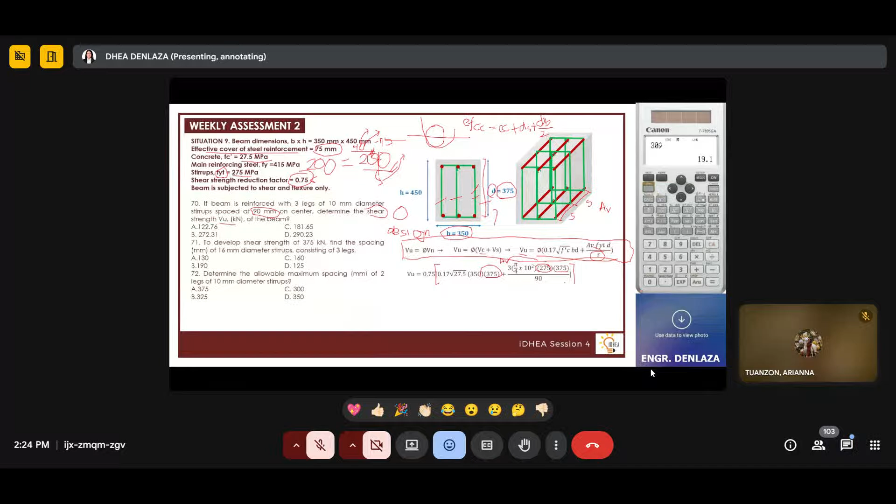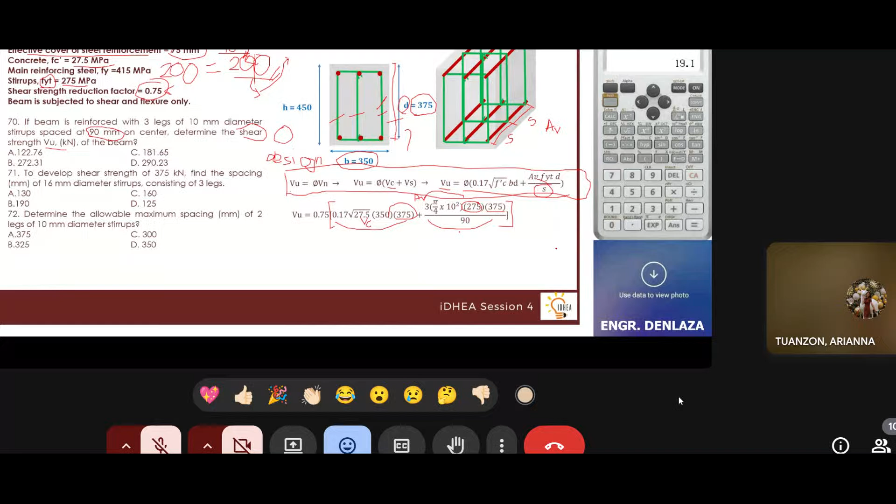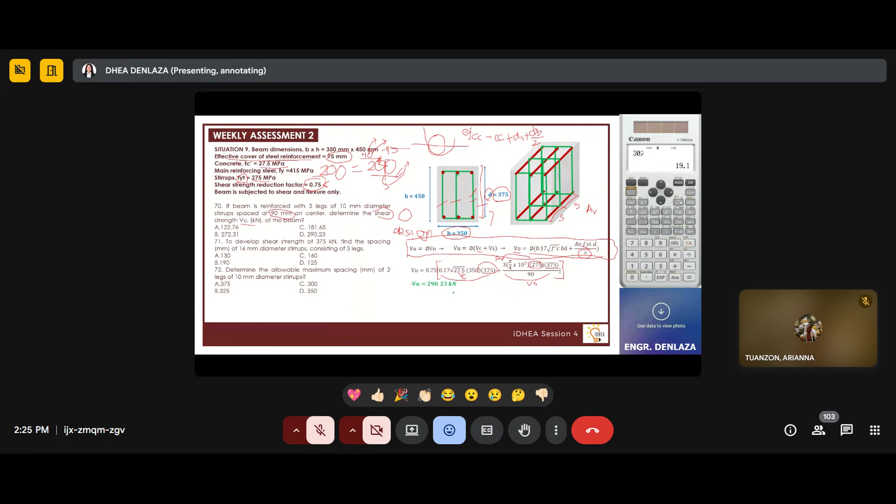So this is VC, the shear strength induced by your concrete, and then this one here is your VS. So you enclose 0.75 for VC and 0.75 for VS. When you type that in your calculator, you will obtain 290.23, and that is our final answer for this first question, which is 290.23.

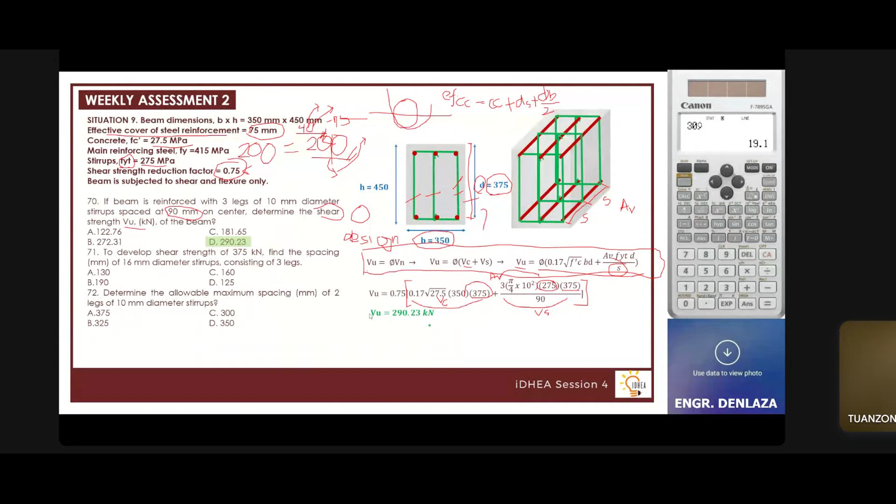Next question is to develop a shear strength. This time it's reversed, shear strength is now the given. We are to find the spacing of the 16 mm. This time the stirrups diameter is 16 mm, consisting of 3 legs, still 3 legs. So it's reversed from before, it's going from outside in instead of inside out.

When you expand, the equation still looks the same. That's VU. The reason it's e to the power, e times 3 here, denotes that it's times 10 times 1,000, rather times 1,000. 375, 375,000.

That is E3. And from 0.75, I just transposed the strength reduction factor under VU, guys. When you expand that, 0.17, 27.5, it's still similar. B 350 and 375 plus 3 legs, that is 3 legs multiplied by pi over 4 times. Now it's 16 here because the problem says 16 is to be used. And then 275 times 375, and the unknown here is the S, which I highlighted in green, and if you shift solve that, you will obtain an answer of 162.41 mm.

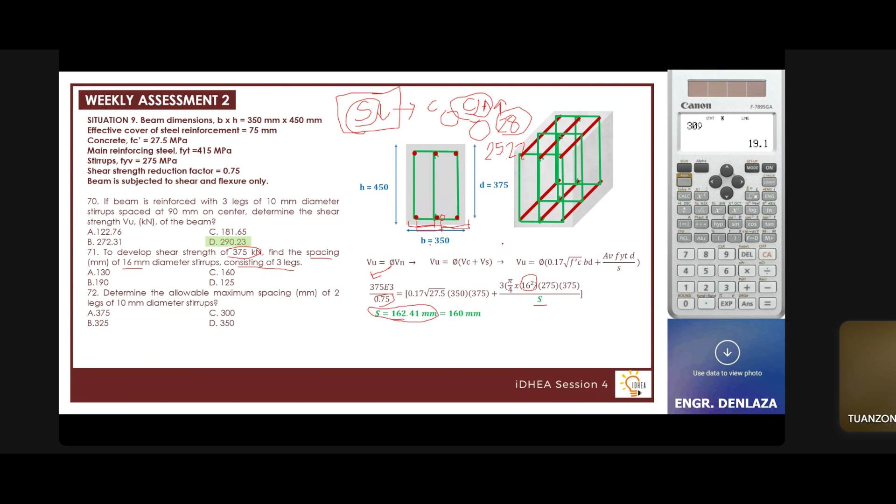Two legs - if you notice it's two legs because it was stated in the problem. Since it's two legs, it's in the manner of a U shape - it forms a U because it's two legs. The diameter of the stirrups to be used is 10 mm.

Based on NSCP, what is called the minimum area of your shear reinforcement has this formula: 0.35 multiplied by the base or width, multiplied by the spacing, over your FYT which is your yield strength of your stirrups. If you transpose this, isolating S to get the maximum spacing, S max, it will look like this - the AV is transferred up to the FYT, and 0.35 becomes the denominator along with your B. This is now your derived formula for getting S max, your maximum spacing.

But if it's too hefty for you and it's giving you difficulty, you can actually shift-solve automatically using this equation. This is just for visualization so you understand that this is the equation for your maximum spacing for stirrups. Now if you plug in the values from the problem...

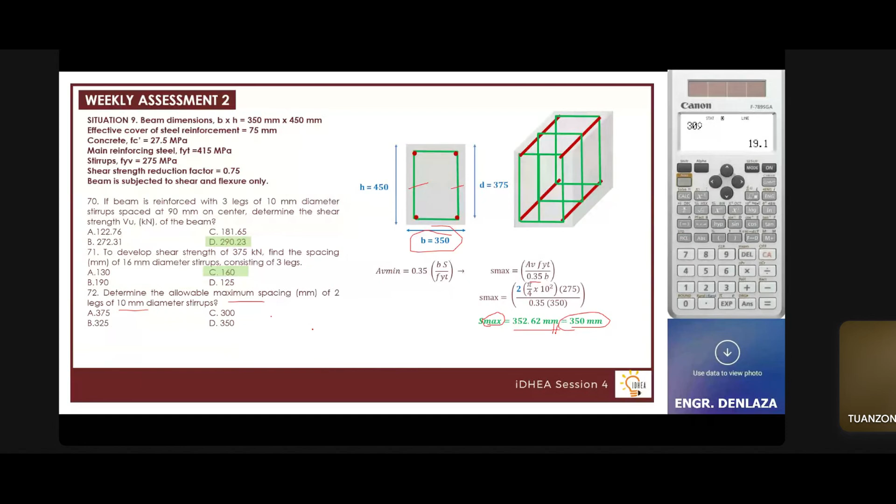And then B is your beam or base width, and you will obtain an answer of 352.62. If you notice, we round down because we cannot exceed that - maximum spacing means there's already a limit. So you round down, round down. That becomes 350, and that is letter D.

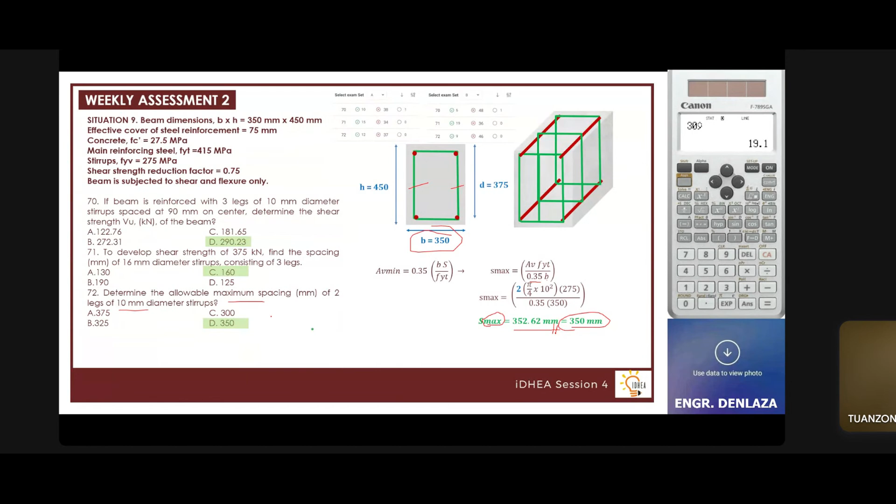Okay, did you really understand this? This discussion was quite long for this first problem - what is this called? Shear, since this is the first one about shear. In the latter part it becomes easier to understand since the concept has already been explained. Can you send me a reaction if you're still listening and if you understood that explanation? I know fast learners already understand, but I'm explaining from the point of view of others who still haven't understood the concept behind shear and how to approach it, so I hope you understand.

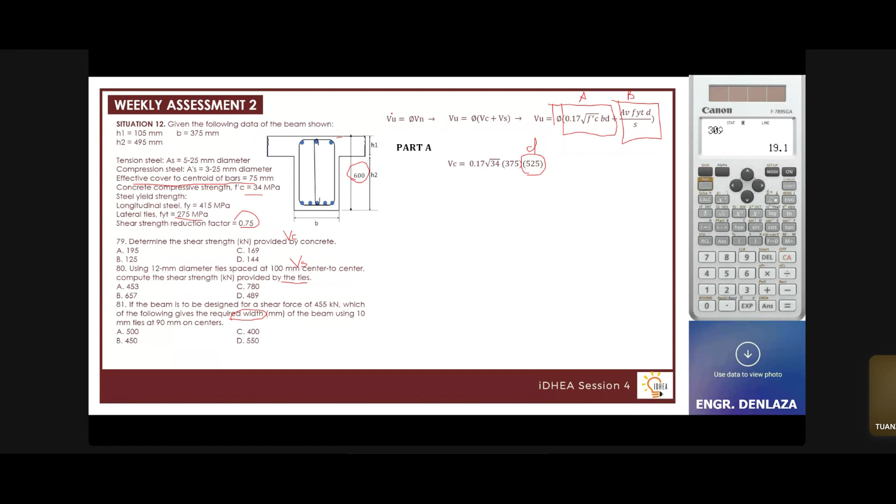And 600, since effective depth by design is defined as the distance from your extreme compression fiber going to the centroid of your tension steel reinforcement.

So in order for you to obtain the effective depth, guys, all you have to do is minus 600 with 75, which is the effective cover of the centroid of bars.

That 75 is also this height, guys. This is also 75. So if you check this illustration, 600 minus 75 gives the effective depth, which is 525. Okay?

All you have to do is calculate that. It's now 195.15. So it's not that hard a problem, ma'am. It's easy if we understand the concept, know the formula, and know how to approach it.

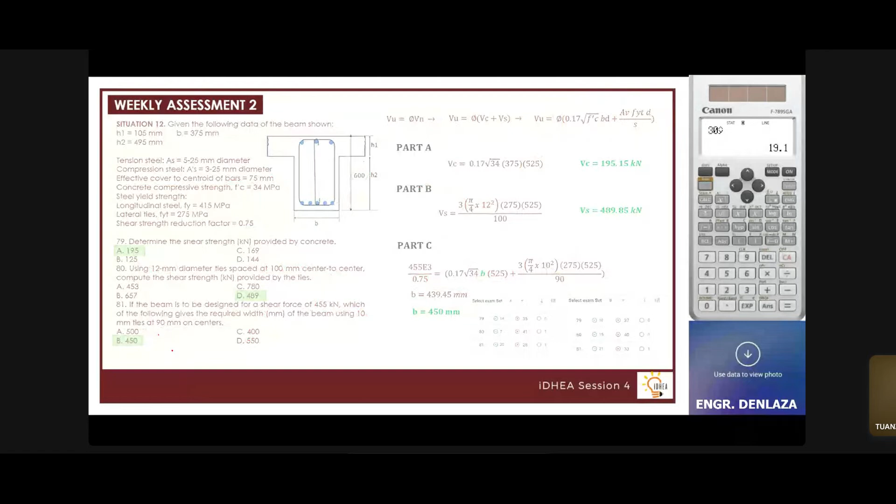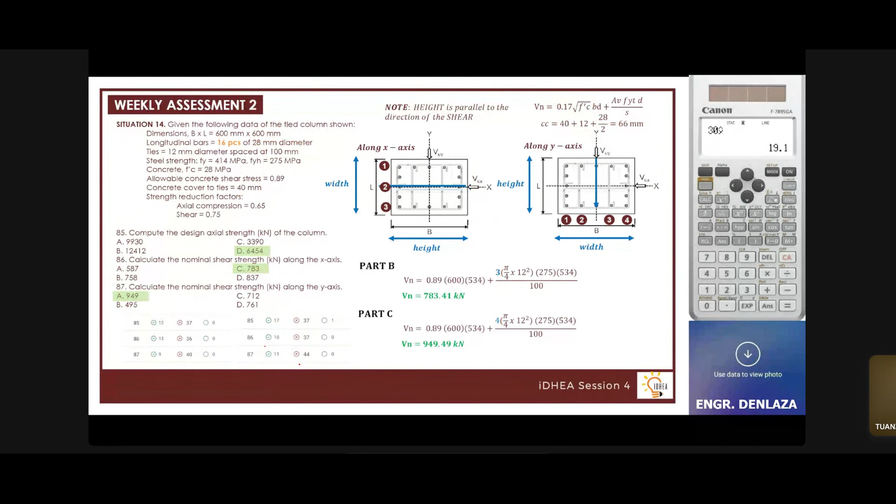Now let's try to solve this second to the last problem. Second to the last, this one too. Situation 15 for Set A is this one.

For those in Set B, please still listen, because what if you encounter this - the difference between both sets is just that Situation 15 for Set A is effective length chart, the alignment chart, and Situation 15 in Set B is the centroidal properties, the geometric and plastic centroid. I will discuss both so those in Set A and Set B can also listen to each other's questions.

Because this topic is still about columns. So it's given that there are columns and there are beams with their respective dimensions as well as their moment of inertias. Also reflected here are length 1 and 2, and height 1 and 2, and we have joint members A, B, C, D, and I.

We are to use the alignment charts in solving this problem. So the first question is: what is the effective length factor of DA? Given that it is inhibited against side sway, so basically it's non-sway, it doesn't sway.

Now, for the effective length factor of column DG - DA still applies here. That's what you analyze for number 88. And then for number 89, column DG is what you analyze.

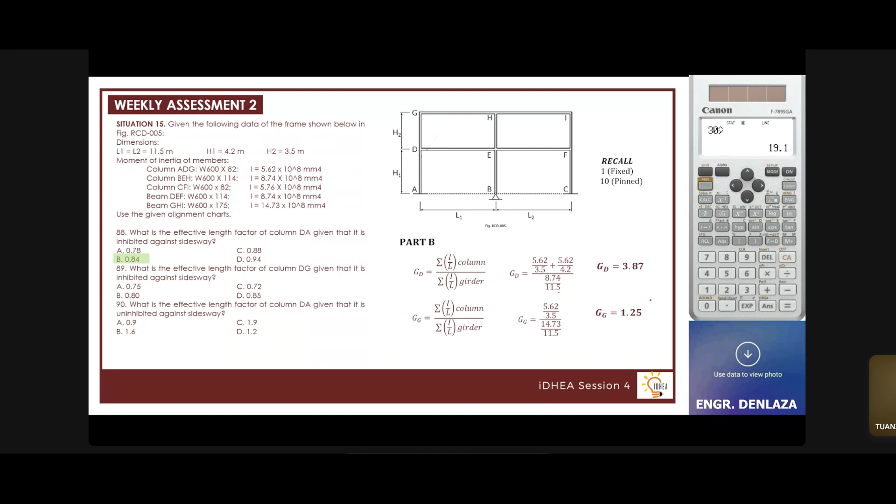Similarly, we'll do the same as the previous problem, guys. We'll plot these two values to form a line, and whatever approximate value that is, that becomes your final answer. So this is 1.25, probably around here.

And then how about 3.87? So it's somewhere around here, 3.85, 87, and then form a diagonal straight line. Whatever point here becomes your final answer. So the scaling tells us it is 0.85. Your final answer should be 0.85, and that is letter D in this problem.

And lastly for this problem: what is the effective length factor of column DA given that it is uninhibited against side sway? We already solved the effective length factors of DA, right? That's 3.87 and 1. But the difference now is the chart we will be using. Earlier we used the non-sway chart because it was inhibited against side sway; now it's uninhibited against side sway, or sway frames, so we'll use the alignment chart for sway frames.

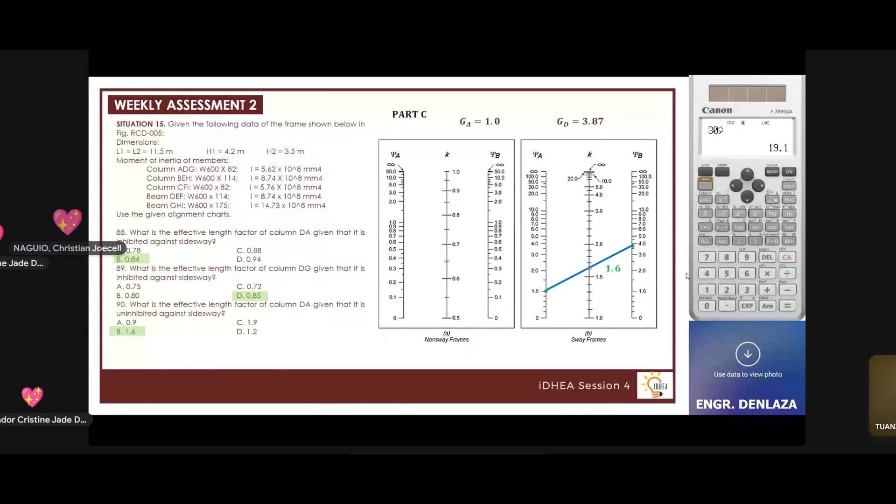So you understood that, guys? By reactions, did you understand, did you understand? Again, same names we see recurring, so that's good for you, at least you've encountered the alignment chart and know how to use it. Again, the scenario with this alignment chart is just approximation, guys. You're not allowed a ruler in the board exam, so you need to practice drawing straight lines if the alignment chart comes up. This has appeared in past board exams, guys.

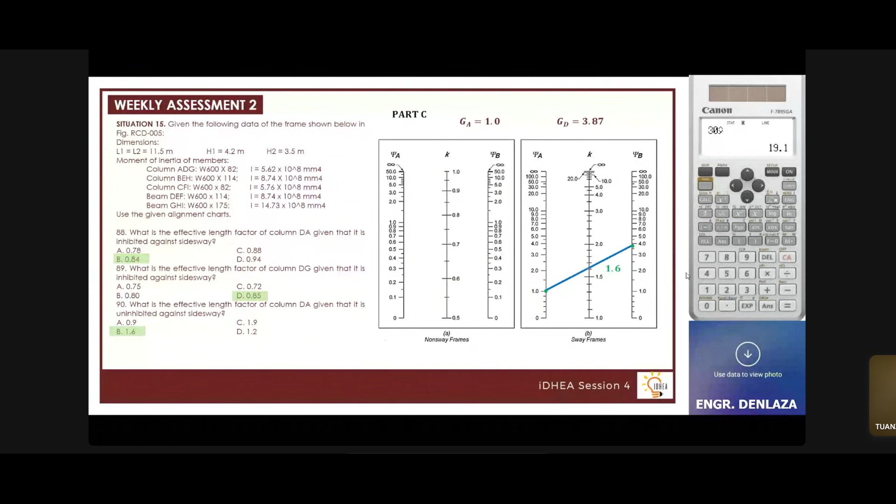And lastly, for this last problem for this discussion -- I'll end around 3:16 or so, almost there, I think it'll end by 3:25 or around 3:30. Just bear with me. So now our scenario here is to calculate the geometric, plastic, and the moment -- bending moment.

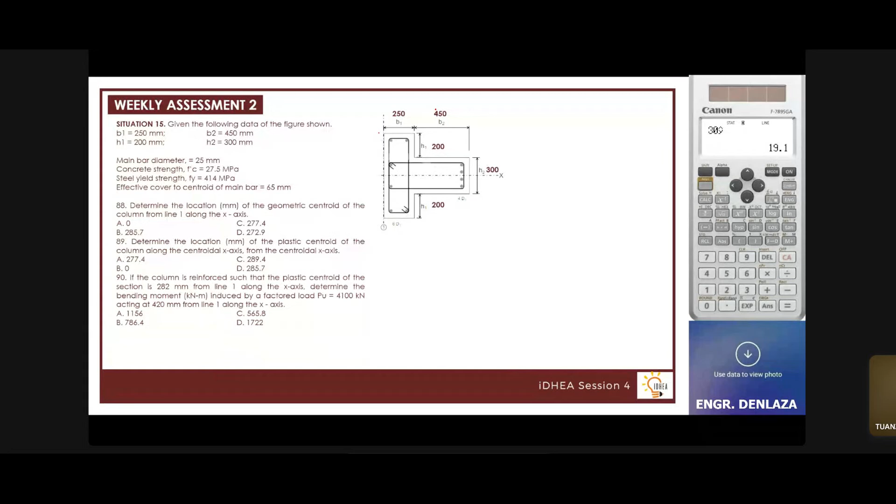But the scenario here, this is the column and you are given this type of cross section. You can see from line 1 there are 4 reinforcements, then 2, and then another respective reinforcement here which is 4. The values, the distances of the dimensions are reflected: it's 250, 450, to 200, 300, and 200. And if you sum it all up, guys, it's 700.

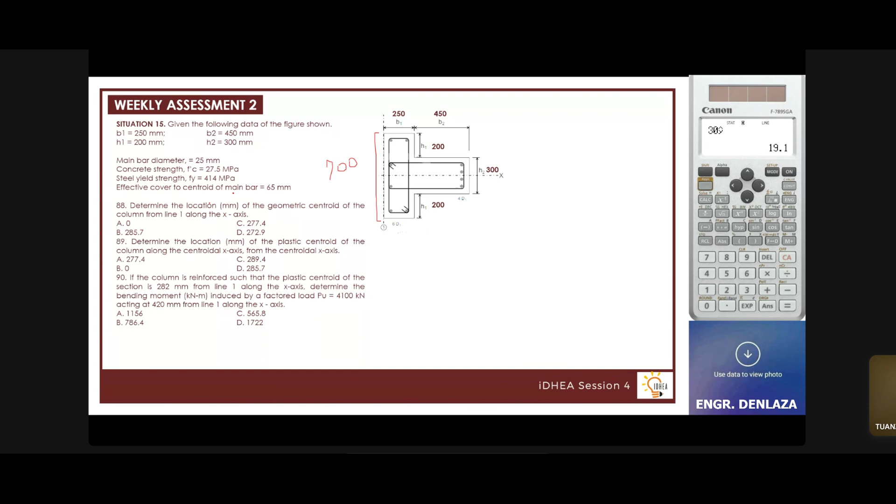So to make it easier to understand for all, the first problem tells us to determine the location of the geometric centroid. Earlier the problem was calculating the geometric and plastic centroid, neglecting the area displaced by the steel. But if the problem notes that the area of concrete displaced by steel should be considered, then the solution is different. But I'll probably give that next week or so, to show you the differences between the two.

So now, if we analyze it, the geometric centroid should probably be around here, if we analyze it here. But we don't know the exact value yet. So I want you guys, to make use of your calculator, please get your calculators ready, guys, so we can calculate.

Mode 3.1, okay, that's mode 3.1. Now I want you guys to enable your frequency. For Canon calculators, how do we enable our frequency, guys? Wait, let me clear my calculator first.

Wait, let me clear this. How do we do that? Just go to mode 3.1, then shift, mode, down arrow, 4, stat, then select 1 on. Your calculator should look like this, with X and frequency on.

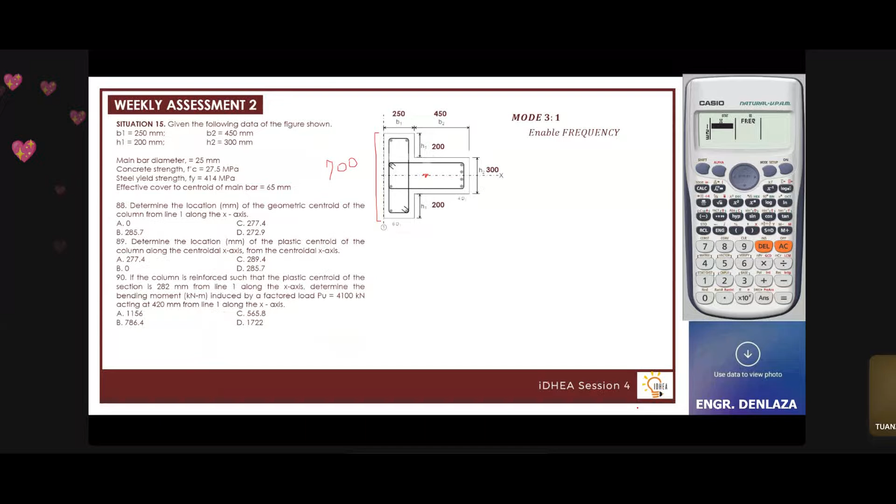Okay, that is still mode 3.1, then shift, mode, down arrow, then 4, stat, then 1 on. React if everyone has frequency on. Guys, does everyone have frequency on? Okay, so again, to next slide. How do we enable that? Again, shift mode, down arrow, then 4, stat. That is how you do it.

Now let's try to equate the X value as the centroid and the frequency as its area. How do we calculate that? How do we enable that rather? How do we interpret that? How do we get these values that are on your screen?

If you would notice, the centroid of this cross section is just 250 divided by 2. Okay, 250, right? So the centroid from line 1 - this is line 1, right? This is the baseline. That is line 1. And the distance of the centroid from your first cross section is 250 divided by 2. So let's type this into the calculator. That's 250 divided by 2.

Now, if you would notice, let's go to the second cross section. That should be 250 plus 450 divided by 2, because the center should be somewhere here. So that is now 250 plus 450 divided by 2. Okay, we got all the centroids.

Now, how do we calculate for area? It's just force over area - it's just length times width, guys. So this is now 700, 200 plus 200 plus 300 equals 700, times 250. Because this is the first cross sectional area, so that is 700 times 250. So that is 700 times 250 equals. Everyone got it, right?

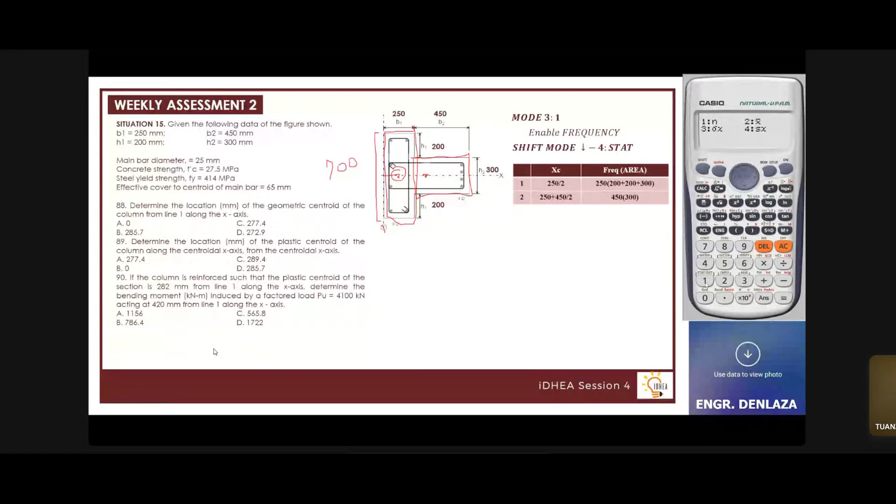And now, for non-Canon users, guys, please press CA, Shift 1, then 4, then 2. And you will get the same answer of 277.419, and that should be the answer for your first question, which is the geometric centroid.

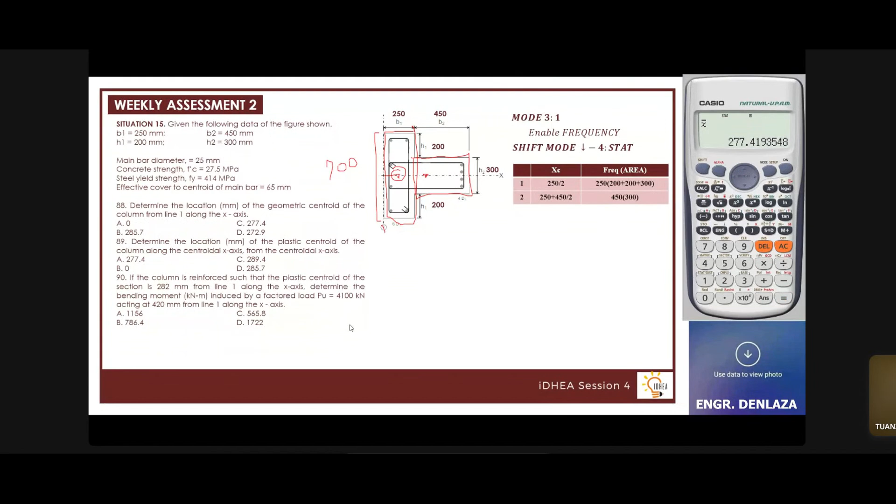Let's proceed to the next slide. So again, if you're using Canon, that's apps 5 SVAR, then type 2, which is the X bar X. So you will have a final answer of 277.419, which is the geometric centroid of this problem, and that is letter C. Okay, everyone got it?

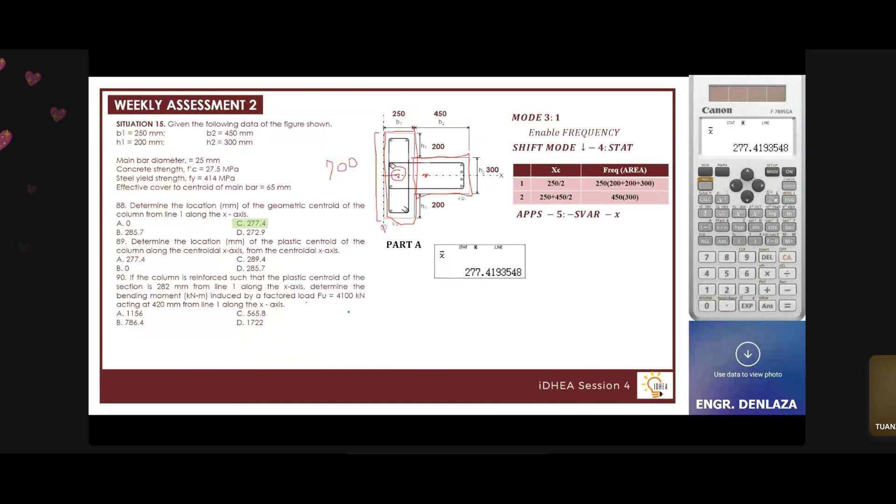Okay, now let's try to solve problem number 2. Before, honestly speaking, I was also a victim to this kind of trap question, because I had no basis either.

Centroidal x-axis and centroidal x-axis. Basically, guys, your plastic centroid is located along your centroidal x-axis, and from the centroidal x-axis, technically there is no distance, it is still along the line. So since it is along the line, we have no distance, it should be 0.

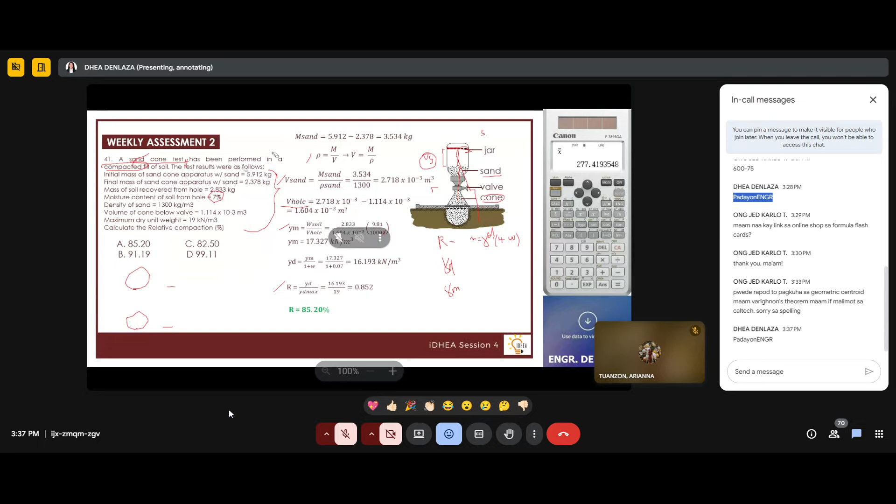Dagan na din ako annotations. Ay, isad pa dyan kayo annotate, kinabilin sa opisina ato ang tab. Sorry.

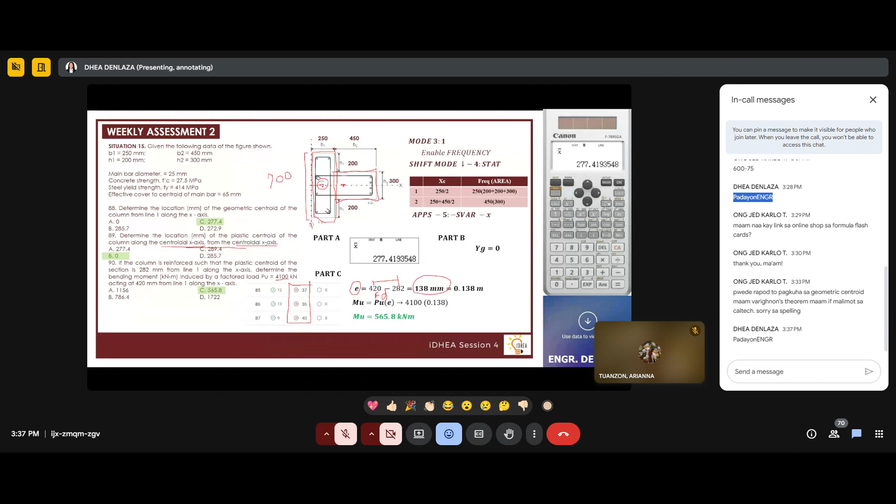So nganong 0 ni siya kay again it was stated in the problem, if find nimo ang location sa plastic centroid nga column along pag along centroidal x-axis. So same siya og location sa imuhang x-axis. So kibali wala siya distance na maong in core. Kibali naa siya sa along the same, parallel siya in the x-axis. So that's the main reason nga 0 siya. Kay wala ko kakita ni before katong nag-solve ko ani nga problem na biktima si Dhea. Sayop and sayop dayon ko.

Mo to siya. Wala na may questions. More to ang questions answered. Okay, wala na diy questions answered.

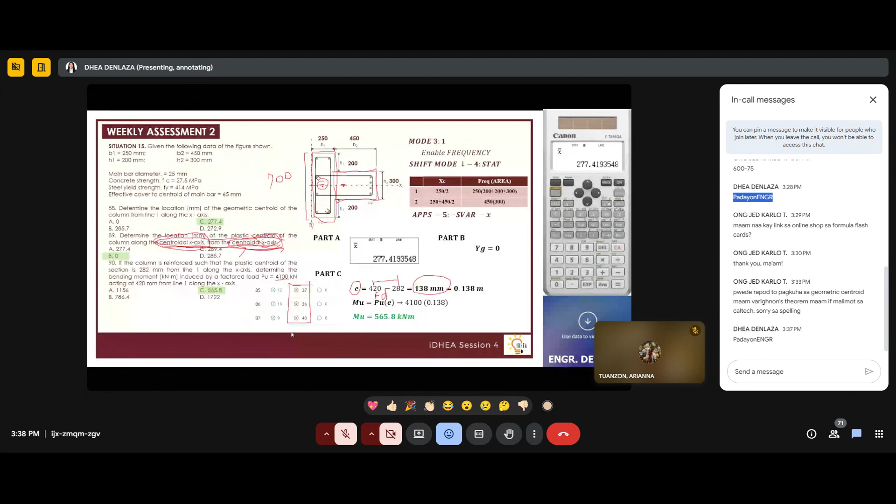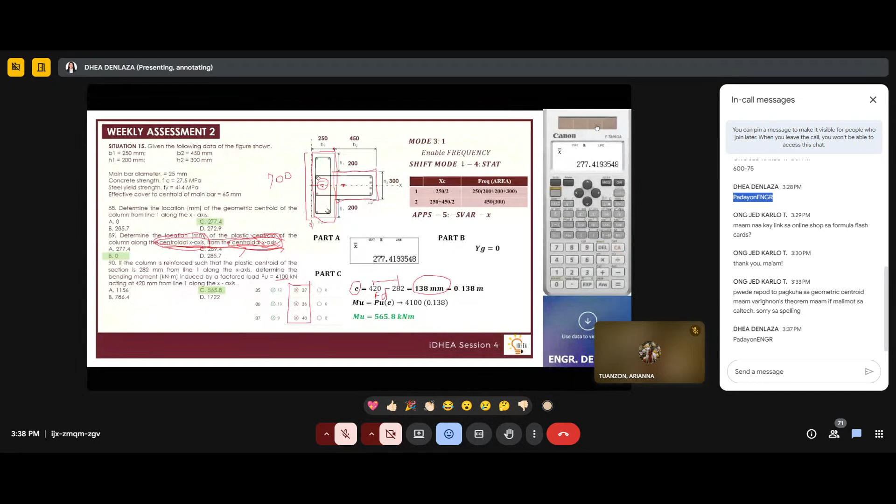So I hope next time you encounter problems, do not put the fear first. First analyze the problem, unsaon siya pag-attack, kay siguro man guni balik-balik ang mga concepts especially sa HGE and PSAD, balik-balik po yung ang concept sa PSAD, pero ang difference lang ana is that wala jud mo balik ng mga problems, wala jud exact problems kamo gawas, so it's a matter of bakbakan siya sa concepts nga baon. So if sabtan niyo ang concept miskan dili siya usual nga given nga mga illustration sa diagram, so masolve ninyo siya. So again, ayaw ninyo batasana guys nga mahadlok mo og problems. Ang problems ang adlok ka. Yun siya, charot, ina na siya. Ayaw mo kadok og problems. Ang problems dapat madlok ninyo.